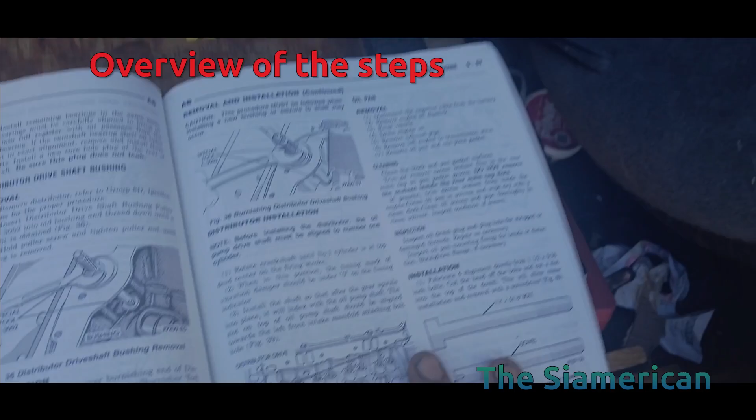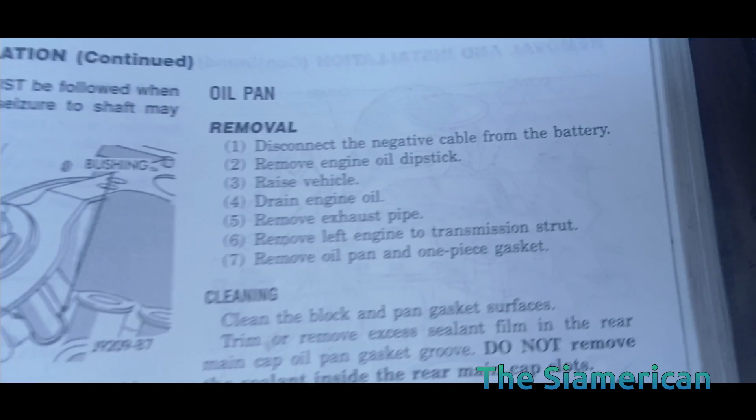But for this particular series, we're working on the 5.2 liter engine. So to remove the oil pan is relatively easier because there's less steps, but these are the main steps. What it doesn't mention in these steps is to get the pan off, it helps to take off the starter.

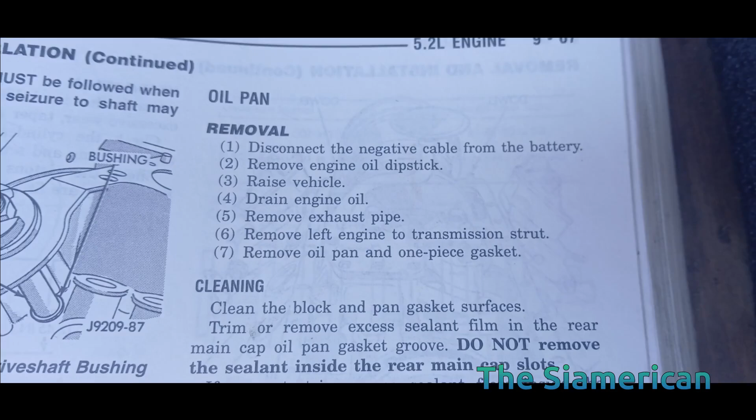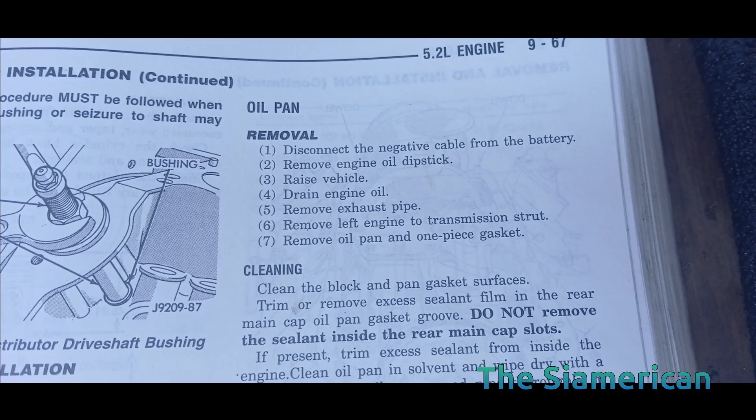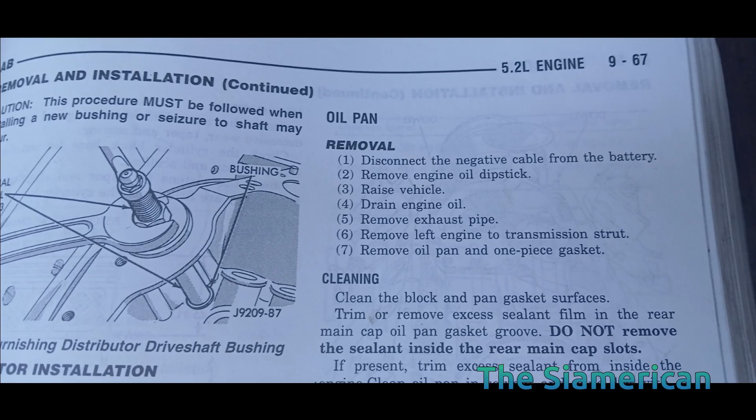That step is explained in the 3.9 liter instructions, but I found when I did this job that I did have to remove the starter and the inspection plate to get that little extra clearance to get that pan off, as well as loosening the bracket that holds the transmission lines in the front. That also gave me a little bit extra wiggle room to get the pan off, and so that was my experience. But yeah, basically get the pan off, you clean it.

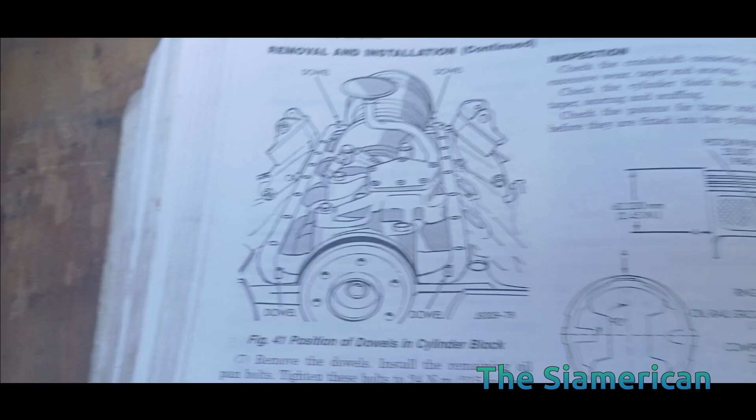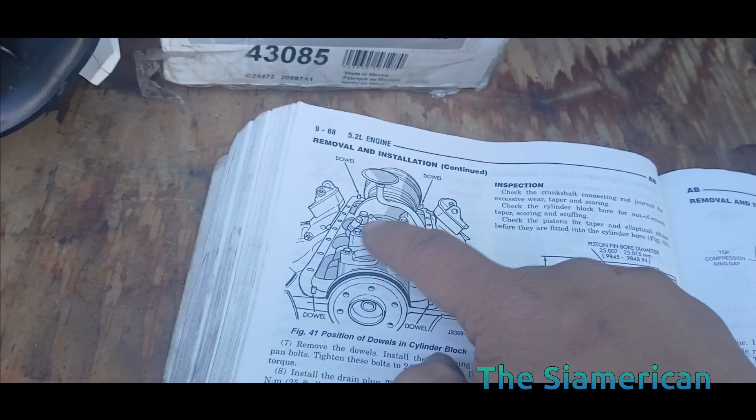Once the pan is open, you have access to this from the underside. You have your pickup tube, you have your oil pump, and these all need to be removed to get to the oil seal, the rear main seal, which is back there. There's 2 parts.

There's one that comes on the rear main bearing cap. There's one main bearing cap here, 2 big bolts there you got to pull off to remove that. They're torqued pretty tight, like 80 foot-pounds, maybe even more if it's been on there for a while. But yeah, you have to break those 2 bolts loose, and then you can access it. One half of the seal is in the bearing cap itself, the other half's in the engine block.

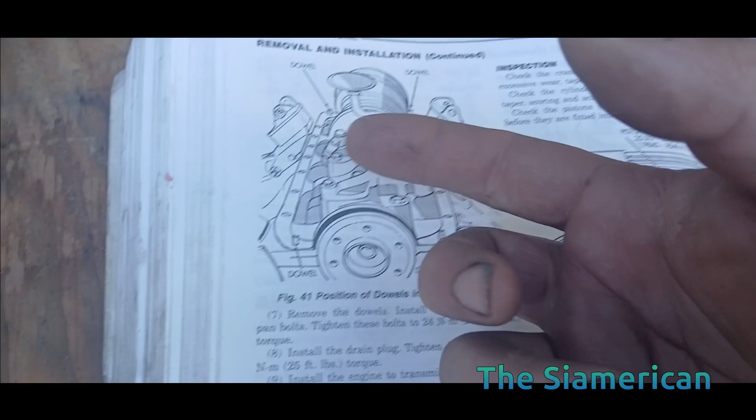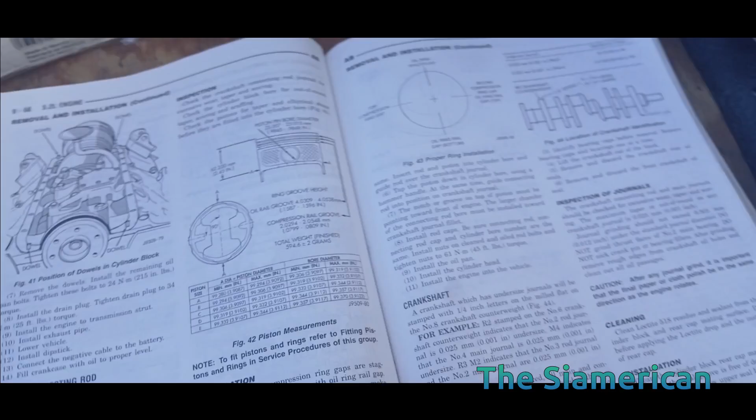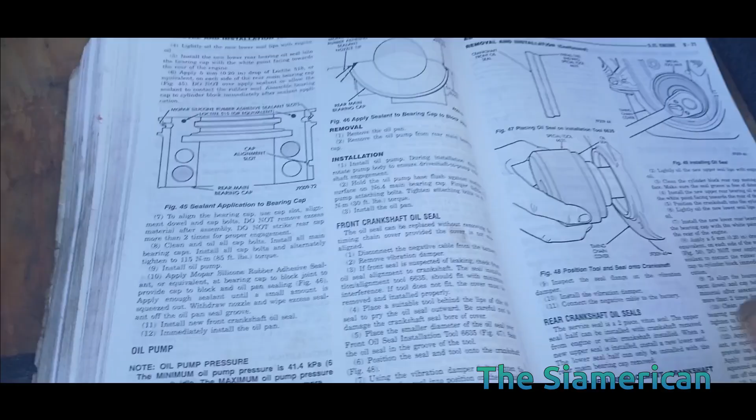So this is all the instructions for the rear main seal, so we don't have to remove the crankshaft. You could do it too if you have the engine out and you have the crankshaft out. There's a whole set of instructions how to change those seals with the crankshaft out, but keeping that in and just removing the oil pan, with the engine in the body itself, this is how you do it.

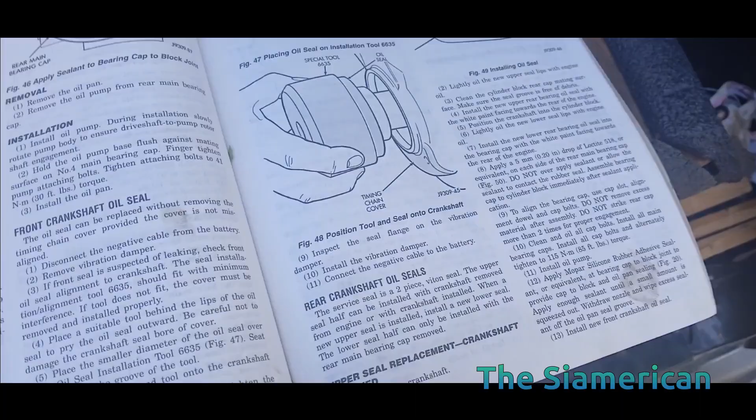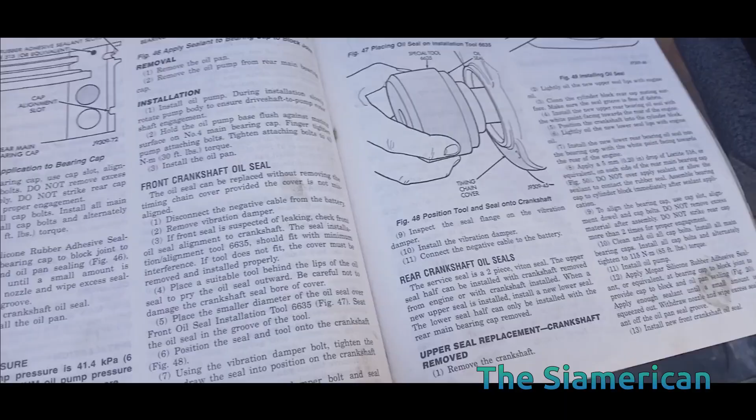I'm going to go through this, but essentially you remove your pickup tube and oil pump, and then your rear bearing cap. And once that's off, you can use a punch or other pointy but not sharp object to tap out the oil seal from the block and from the cap. With the cap off, it's much easier to remove that seal.

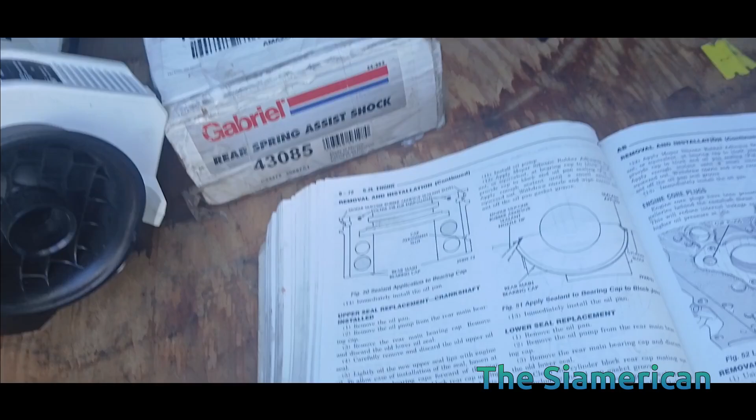And then you have a replacement seal, and there's a specific way to install it so you don't cut the seal when you install it, which I'll show you. And also the final sealing part.

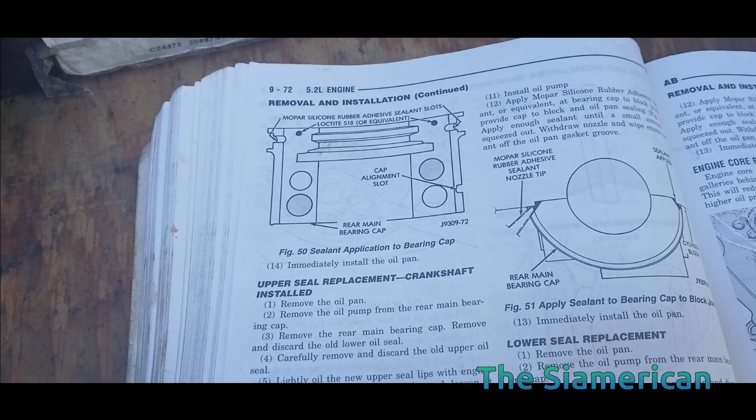This is something that a lot of videos I've seen on Dodge trucks and other Dodge vans about the oil seal got wrong: they just put a bunch of RTV on the rear cap to try to seal this off here, and even put some RTV on the seal that goes there. But according to these instructions, that's a big no-no.

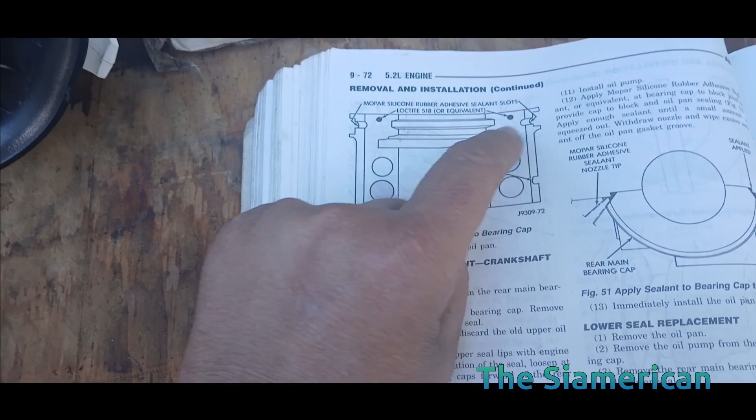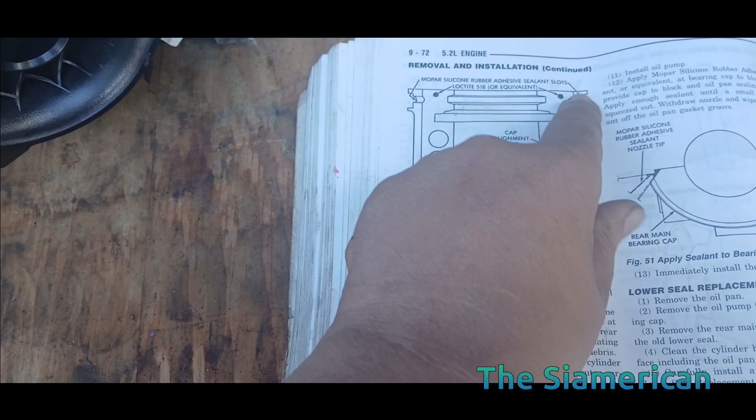You have specific clearances and allowances engineering-wise on that cap, so you're only supposed to put some Loctite on these two caps, which I'll show you, in addition to your RTV in these little slots, which you can do from the outside when you install the oil pan. And of course the oil pan also has four corners you have to put some RTV on, but other than that you don't want to overdo it. A lot of people just put a bunch of RTV here and spread it out, hoping it will seal, and eventually it causes more issues down the road. But anyway, let's get to it.

Just one. Oh yeah, come on. Oh, there we go, okay. Need a little bit of persuasion. It's really hot as shit.

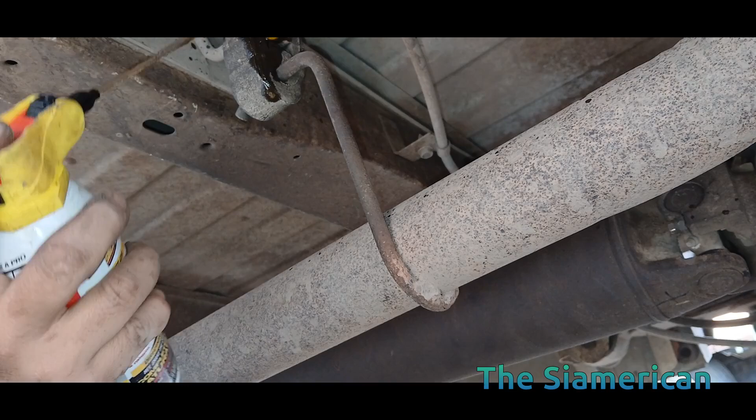Alright, there we go. There goes the exhaust pipe.

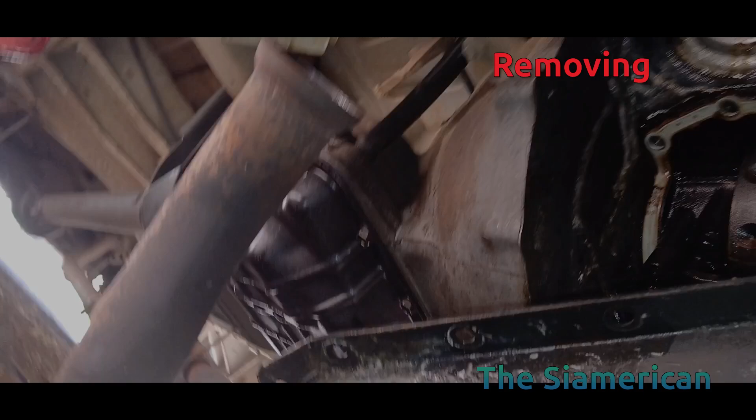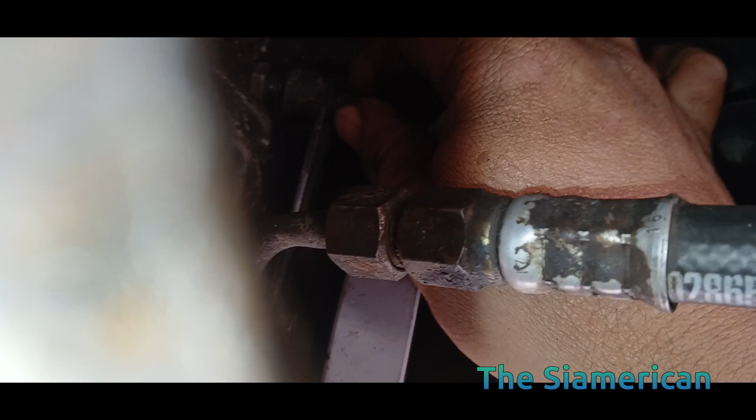All right, so it is ready to come out. I didn't even remove the inspection plate. That would have been easier, but to remove the inspection plate, I had to remove the starter and everything. So I just ended up moving this nut here that holds the transmission line bracket onto the timing cover up here. I didn't move it completely off the bracket. I just moved the nut so I can move the transmission line a little forward to give me a little bit more forward movement so I can try to squeeze it out.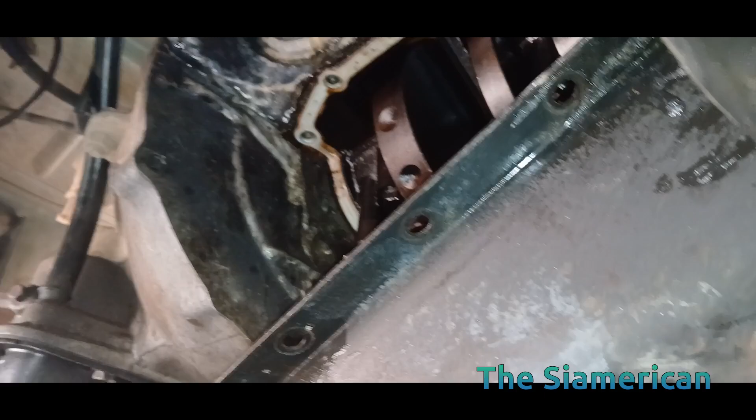And there was just a little tiny dimple on the flex plate or the inspection plate that was keeping it from coming down, but I just kind of persuaded it a little bit and it popped out here. But now you can see why you need to remove the exhaust pipe, because even with it on the floor, it's kind of blocking it from coming back. Let me see if I can't wiggle that out here.

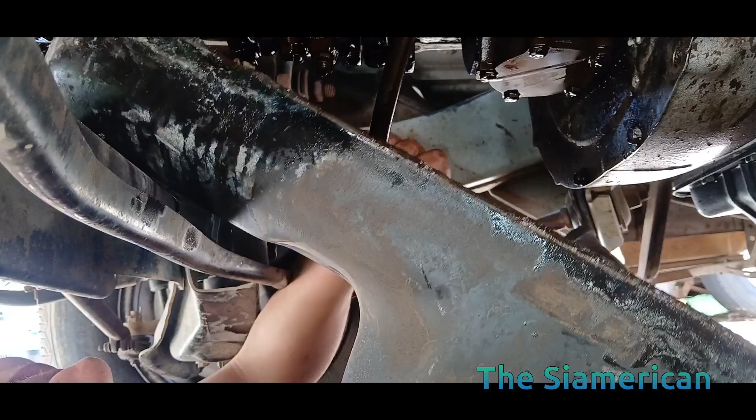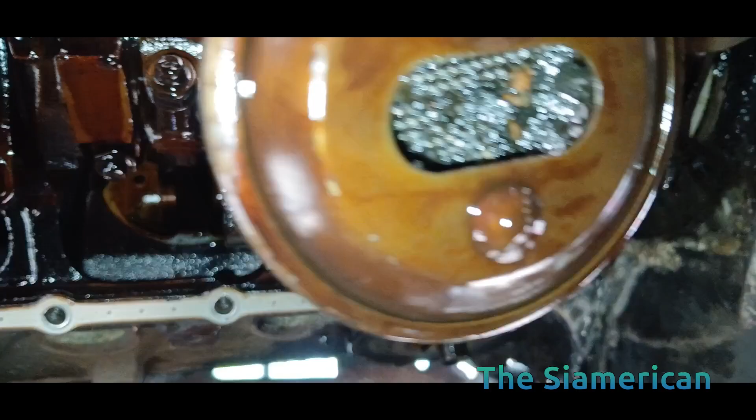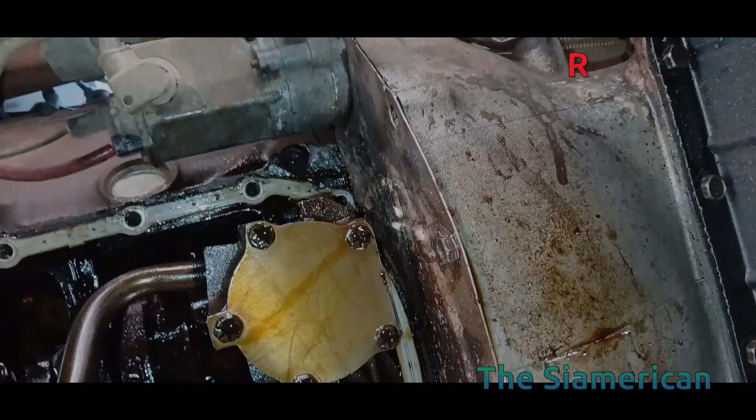The oil pan is out. I'm just gonna show you what we're looking at here. There's the nasty, call it, that inspection plate right there. That little dimple was keeping it from coming out. I didn't have to raise the engine at all. I did have to pull the gasket here. So apparently the only other step to get this cap off is to give it a whack, a light whack.

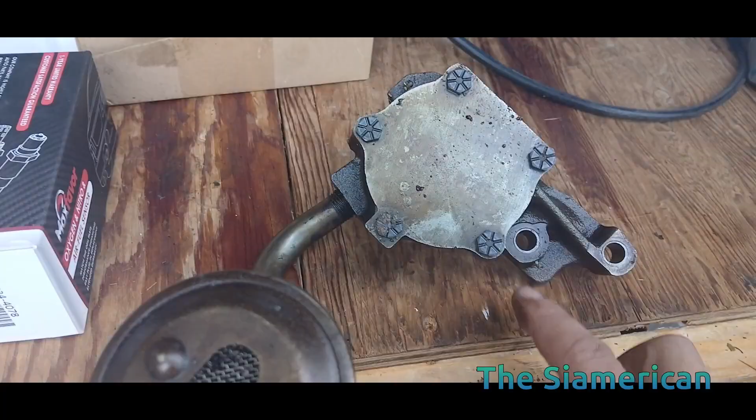Unfortunately, the video I originally recorded of me removing the oil pump, pickup tube and the cap was distorted. So just for demonstrative purposes, I'm going to explain quickly what you do. There are two bolts holding the oil pump onto the rear main cap, and they're not torqued too much. They're like 30 foot-pounds. Shouldn't be too hard to break these two bolts loose, and then this will come out. But you may need to move this pickup tube, which is just screwed in there like this. And then your oil pump will come off.

There's a drive here from the top, and it comes off a hex drive that comes from the engine block. But the bearing cap, once you remove the oil pump and the pickup tube, you'll see the bearing cap, and that requires a good whack or two.

I did end up removing the transmission inspection plate on the bell housing with the starter at this stage, because I couldn't initially get the bearing cap out, so I thought maybe the inspection plate was stopping it. So I removed that, and then I was able to tap the rear main cap off, and it just came right out. And it also made sense to remove the inspection plate and starter in the end, because it makes it much easier when reinstalling the oil pan.

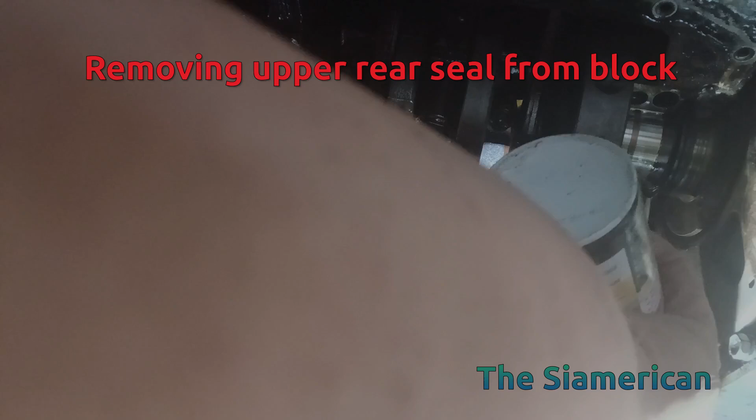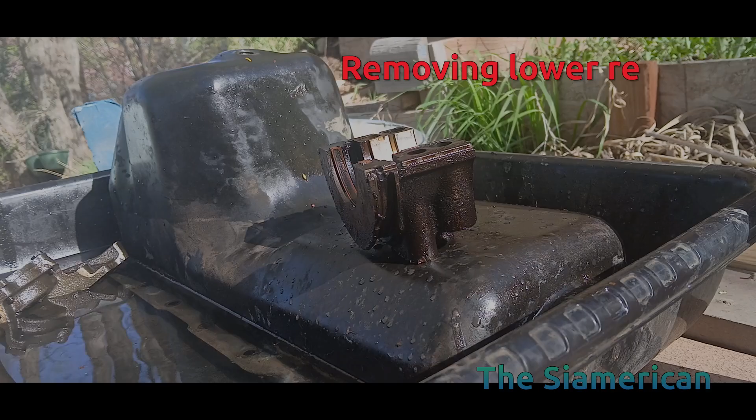If I push it, nothing happens here. Yeah, I don't know what good this is gonna do, but we'll try it, huh? Not really, though. Okay, there we go. We got it. Came out finally. Okay, there we go. Okay, yeah. So got this.